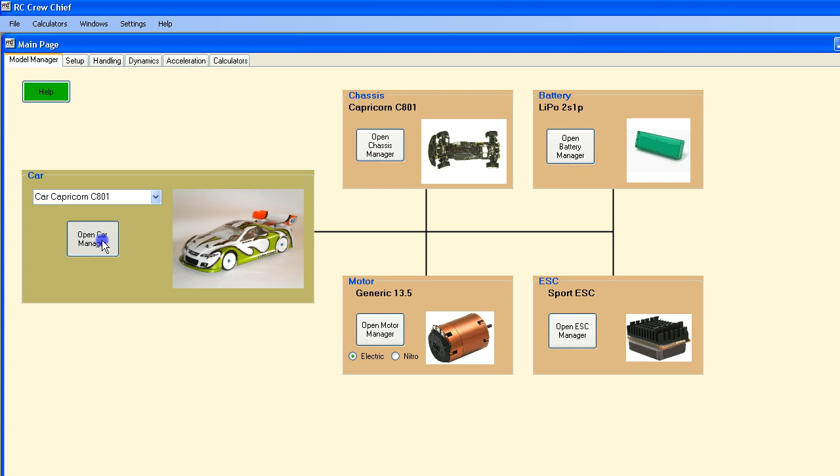So let's pull up a nitro car. The Capricorn C801 is one, and we're going to hook up a nitro motor to this. Right now, the first time you open this and set it up for a car, it will probably be set to electric. So all you have to do is click on the nitro button and then select one of the motors from the list. Right now there's only 4 motors on the list. I'm hoping to expand this in the near future, and you will be able to download more motor dyno curves from the website. So let's select the Picco 21 size motor here, that's a typical motor that would be used with this type of car, and just click save.

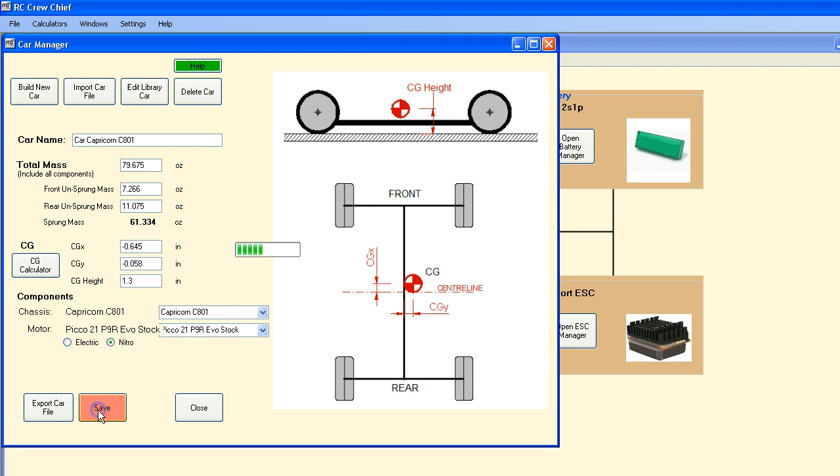Close it out, and so now you see we've got the Capricorn and we've got a nitro motor selected, and the nitro button is selected. If for some reason you may want to just go and edit an electric motor, you can click on this and that would open up the electric motor manager, but we're not dealing with electric here. Let's deal with nitro. So let's open up the nitro motor manager and see what we've got here.

So again, the motor that we have attached to the car is selected for us. We still have these other motors here that we could look at and edit, but we're going to stick with the one we've got assigned here right now.

The other thing that you have to do in the nitro manager is to select the gearing that your car uses. So if it's a single speed, you only enter first gear, and you would just blank out second and third. In this case, this has a 2-speed transmission, so these are the values that are typical for the Capricorn C801 2-speed transmission. The other thing we've got here is a shift RPM, so this is how high the RPM would run before switching over into second gear. The other thing is a shift time.

Now this is the time that it takes the motor to shift from first to second gear. So during that 100 millisecond time that I have set here, the motor would transition from the RPM that it reached in first gear when it shifted, to the RPM that it will ultimately start out at in second gear. So during that period, the motor RPM is changing and the transmission is shifting from first to second gear.

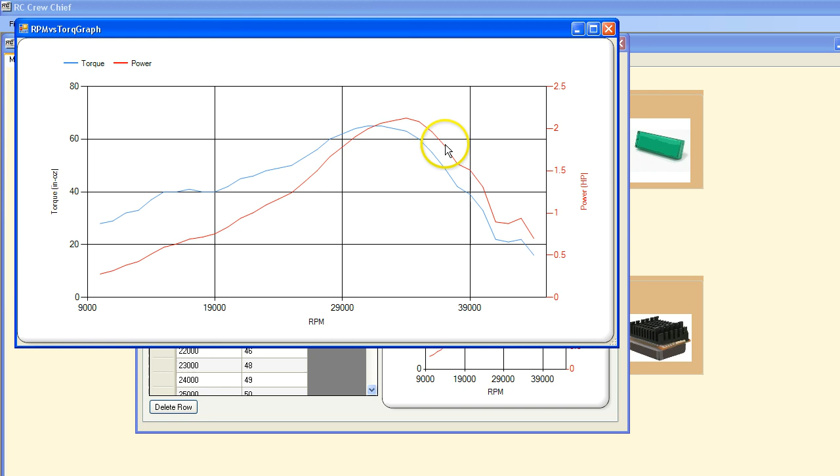So the other thing that we can do here is compare two motors. We've got two selection boxes here. When you open it initially, it'll be set to whatever's on the main page. So we've got our Picco 21, and let's look at the difference if we go to a mod motor.

So the mod motor is one that was modified by AB Mods, one of your engine tuners who can work wonders with these little motors. You can see here there's a significant difference between these two motors, exactly the same, just with the tuning. I'm not even sure exactly what they do, ports and all kinds of other good, wonderful things.

But you can see here we've got a power increase of 2.12 for the stock motor and 2.36 for the modified one. So we got 0.2, almost a quarter horsepower more with the tuned motor versus the stock motor that you would receive from the factory. And similarly, the torque has gone up by about 10% as well. So these are definitely not insignificant changes. This is a fairly substantial improvement in the performance of these motors.

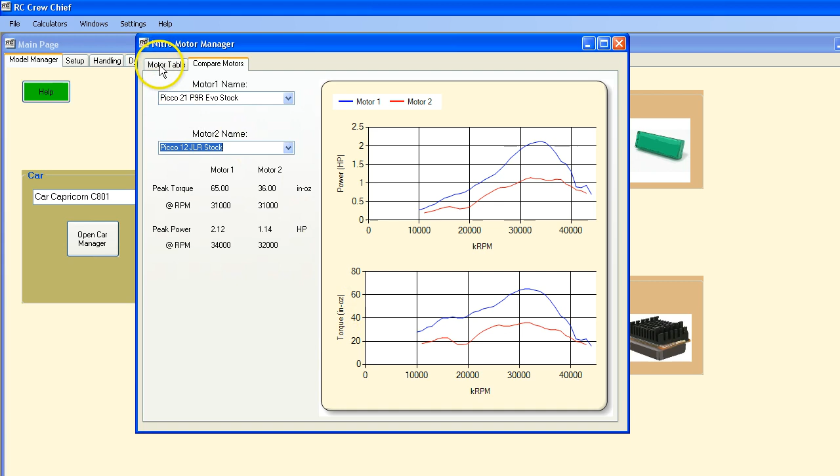So we could also look at the difference between a 21 and a 12 size motor if you wanted to see that. I don't know why you would do that, but anyway, there you can see there's a significant difference in the performance of those two motors. So that's the motor manager.

Now once we've got our car and motor hooked up, we can look at doing some acceleration runs. If you click on this, it'll take a second to run because it's actually running the simulation before it switches into the tab. So here we have the acceleration page, which is very similar to the previous one that some of you may have used before.

But now we have the ability to look at nitro motors. So we have the same interface. We have two different cars here that we can set up differently, and we can look at the acceleration and speed versus time characteristics of the two motors and change all these parameters and see what the effect is.

So first off, let's just do what we were just doing, comparing motors. Let's just switch to our modified motor for the second car. The first car will always be hooked up to the car that you have selected. You can't change it there, but you can change shift RPM delay and all the other parameters that go along with that.

So we've got our Picco 21 mod motor here. Let's just click on calculate and see what happens. So there you go, there is the difference between the two.

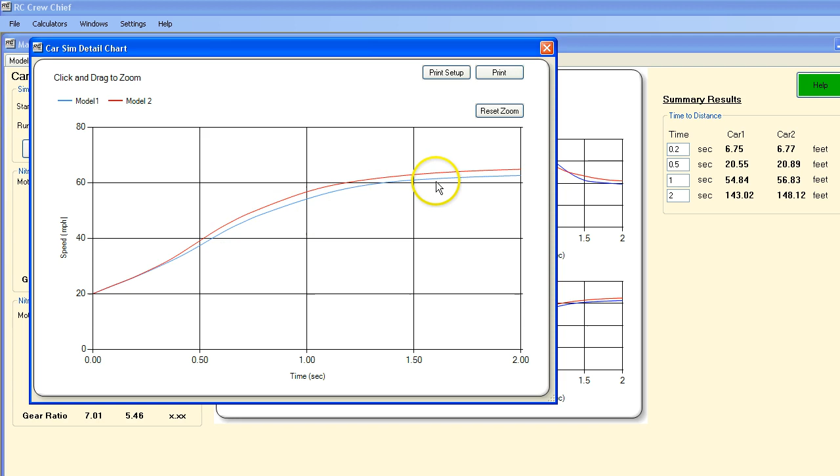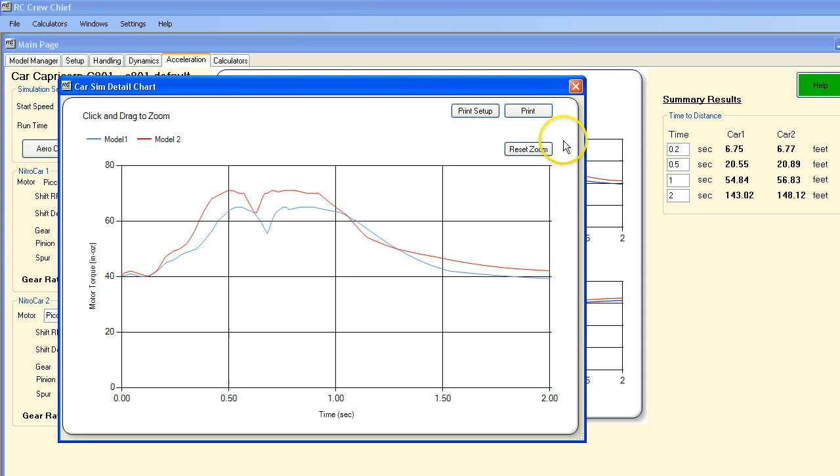If we want to just look at speed, you can see here... I should point out, if you click on any one of these four graphs it will bring up a larger version. So there's the torque, there's distance traveled, and there's speed.

So you can see here that the second motor, the mod motor, has attained a significantly higher end speed. We're probably looking at about 65 miles an hour here versus 61.5, something in that order. So 62 maybe. So you've got quite an improvement in speed.

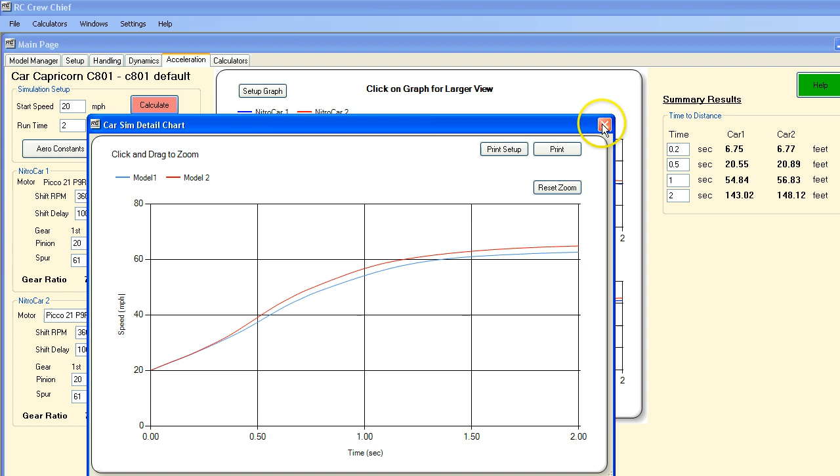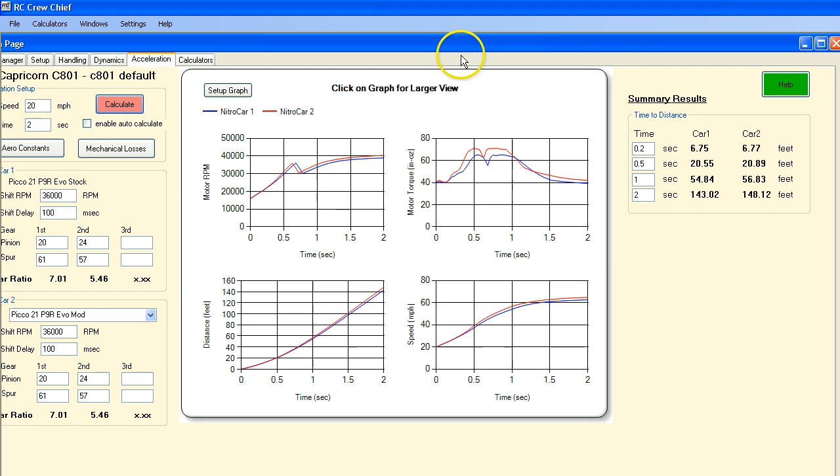The other thing you've got is, because you got more speed, you got more distance. So there's a nice little summary here that shows you the difference between the two motors. Car 1 at the end of a 2-second full throttle run would have gone 143 feet, whereas car 2 would have gone 148 feet. So you've got about a 5-foot difference between those two cars, which at the end of a 140-foot long straightaway is a pretty nice advantage to have over your competitors.

So there you go, you can see the difference right there with just changing the motor. We haven't done anything to gearing or shift delay or anything of that nature.

While I'm here, I'm going to quickly look at the shift delay. I don't want to use up too much time here because you guys want to be able to play with this thing too. So let's just look in here.

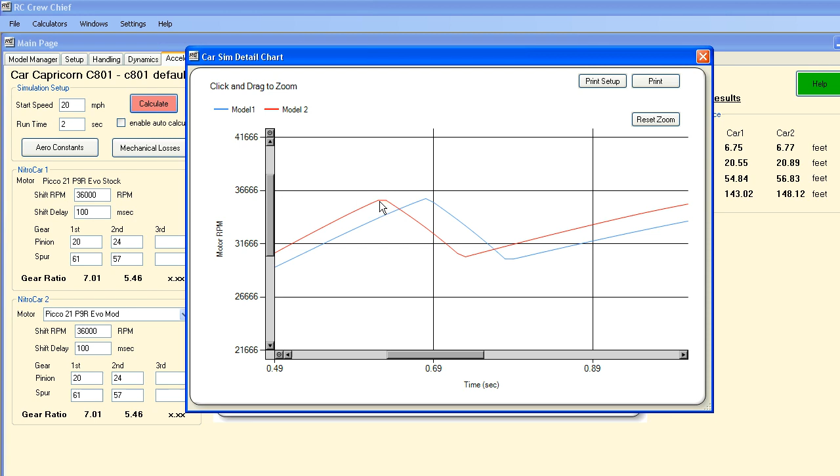So this is your shift delay. The shift delay is the time here where we reached our 36,000 RPM and the motor or the transmission is now shifting between first and second gear. So the shift delay is this time here from there to there.

Right now both these motors are set to 100 milliseconds. So let's change our hot motor here to 50 milliseconds and recalculate that, and you'll see what the difference is in that transition.

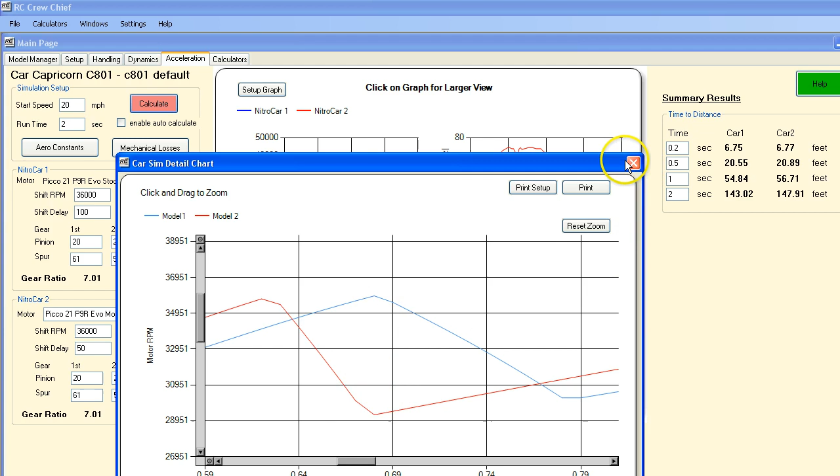So now you can see that motor 2 is transitioning significantly faster between the 36,000 RPM and the 29,000 RPM that it starts out at in second gear, whereas this one is still at 100 milliseconds. So this time, it doesn't make an enormous difference in the end speed, so you can play with that if you want to see what the effect is, but it's not a huge change.

You can also change your gearing, we can go through and change all those values as well. So that, in a quick nutshell, is the new version. Just go in and play.

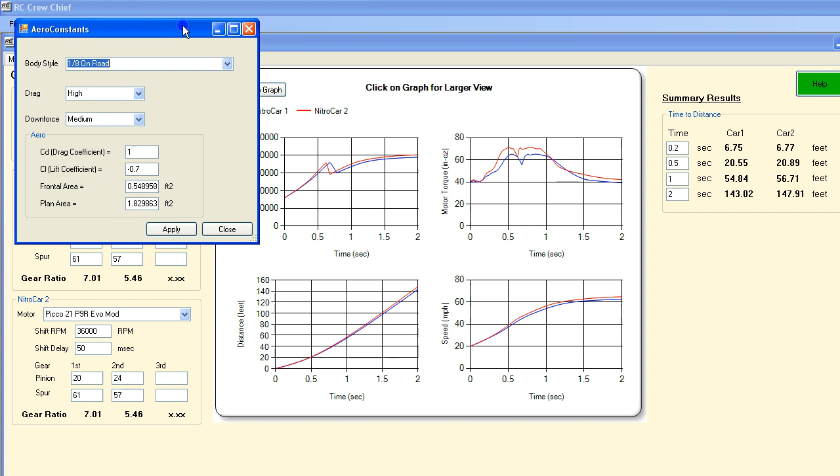Well, the other thing I should probably talk about here is there's a little change to the aero constants. Unfortunately I've searched high and low, but cannot find any good hard data on aero drag or downforce coefficients for our little scale cars. Tried to talk to some of the body manufacturers, but got no response. So what I've done here is based on what I've been able to find online, sort of in-the-range kind of numbers.

So what I've done is there are 3 different body areas in here: 1/10, 190 touring, 200 touring, and 1/8 on road. So just selecting one of these will change the areas that the car has, the chassis or the body has.

Then you can also use a low, medium, or high drag value, and that changes the drag coefficient. Similarly for downforce, that changes what's called the lift coefficient, but in our case it's actually a downforce because we don't want lift.

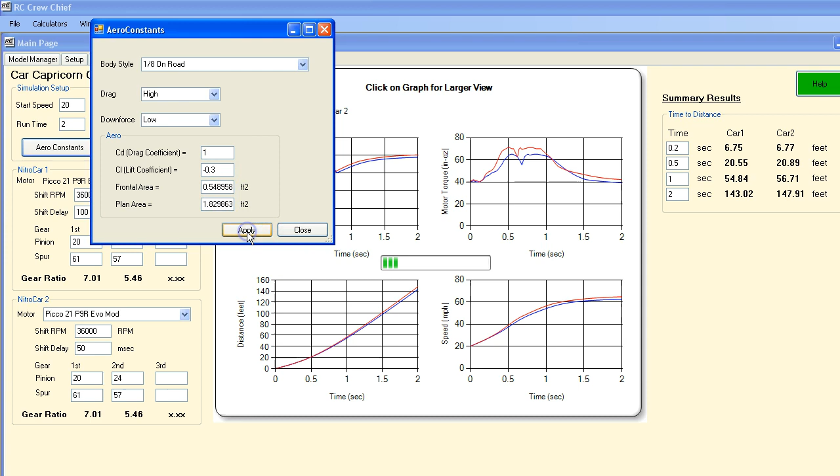So anyways, that's something you can change, these numbers. If you do find some good information, first thing, tell me, but you can change these values to whatever you want to use, and then just click apply. It's going to rerun the simulation based on the new values that I just entered.

Okay, that is it for now. Enjoy.